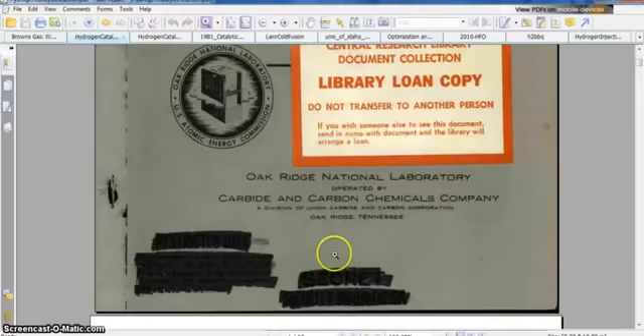One of them being the reactions between hydrogen and oxygen by catalysis and the thermal reaction. This was done by Oak Ridge National Laboratory. If you notice up here, this was once classified—it was declassified. This was put out as secret security information, put out in the 50s, January 15th, 1952. Subject category: reactors, research, and power.

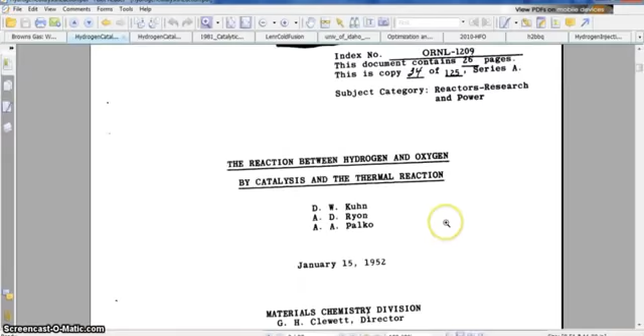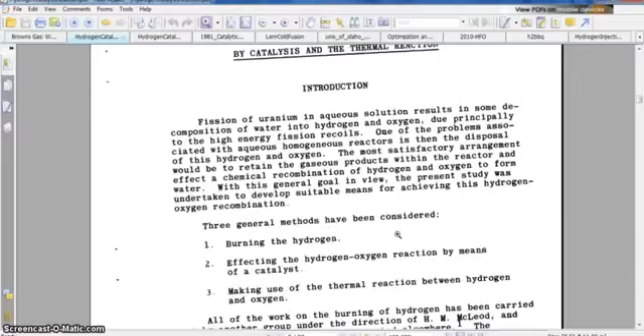This is a pretty interesting report as well, on just basically, it's not HHO, pure HHO is hydrogen. But he found this report that was done in the 50s on catalytic reactions.

And a chart here that was pretty interesting. Flow rate at 1 liter per minute. Temp of the gas is 144 Celsius, and then max temp in the catalytic converter is 242. They just go through these different ones. When you get up to these higher outputs, you get more. This is in Celsius, not Fahrenheit, and Fahrenheit would be a little bit more than that. But it just shows that you could get this thing pretty hot, these little reactors, or catalytic recombiners, so to speak. And again, this is just hydrogen.

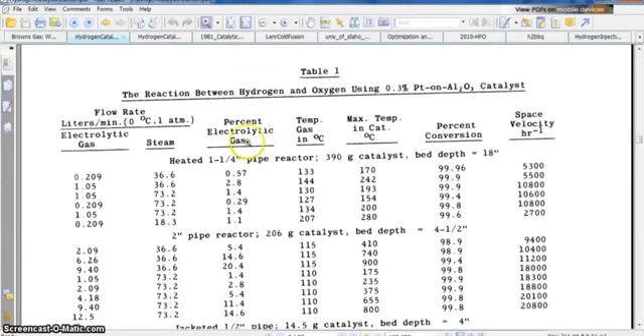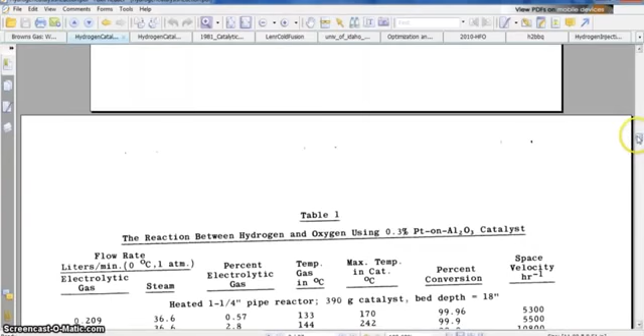Now, HHO is a special gas for me. Has some really unique and interesting properties. And I think these people, like this Oak Ridge National Laboratory, funded by the U.S. Department of Energy in a lot of ways, I think they know that. I think a lot of these reports put out by these big institutions that I have here were put out just based on H2 or hydrogen and nothing on HHO because of what it's capable of.

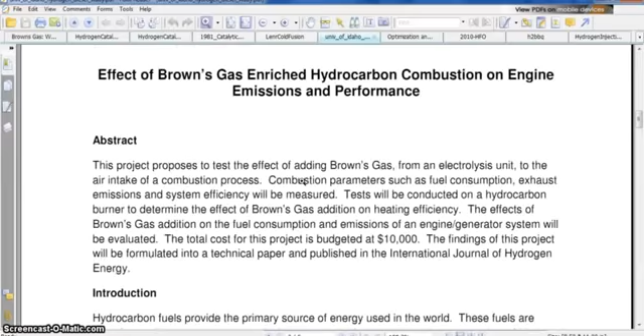But nonetheless, some of these companies have done things. This was by the University of Idaho, doing an effect of Brown's Gas enriched hydrocarbon combustion on engine emissions and performance. Basically HHO injection, submitted to the National Science Foundation. This basically proves that HHO injection does work with intelligent injection and monitoring.

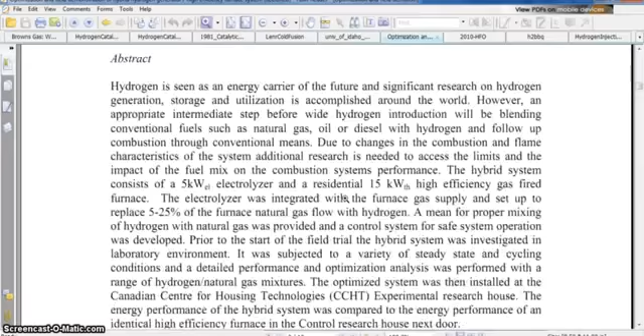Another one where they're actually injecting HHO or hydrogen into furnace systems, causing a more complete burn and more heat output. This was done out of a research institution in Canada, I assume, and all kinds of information in these, all kinds of where they're set up, and they give you the conclusions.

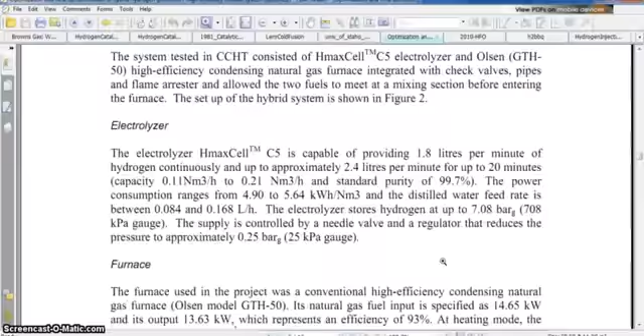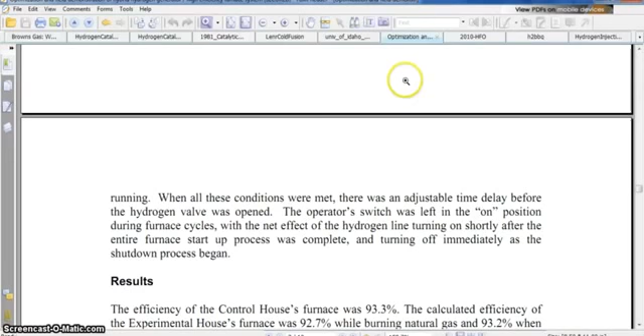Actually, HHO right now is being utilized on an industrial scale on coal-fired plants, things like that. They're injecting into the exhaust to sort of clean that before it reaches the exit of the building. But so much different stuff.

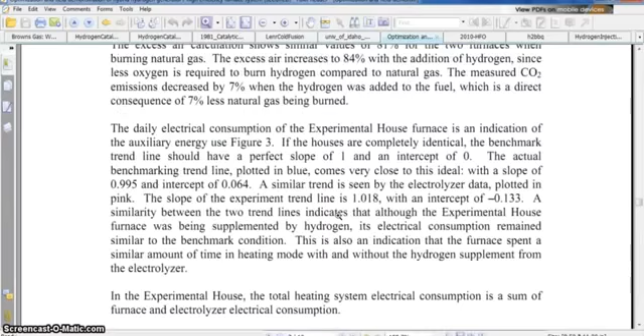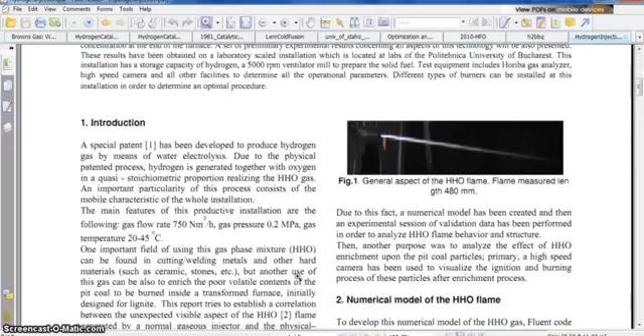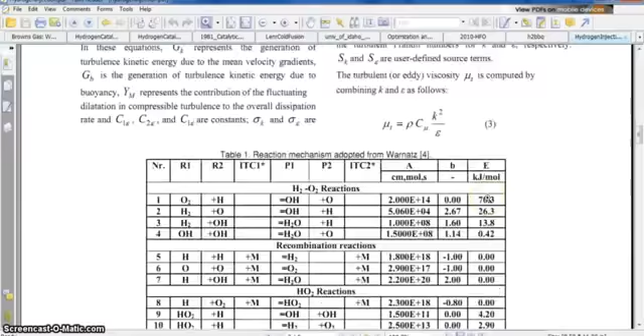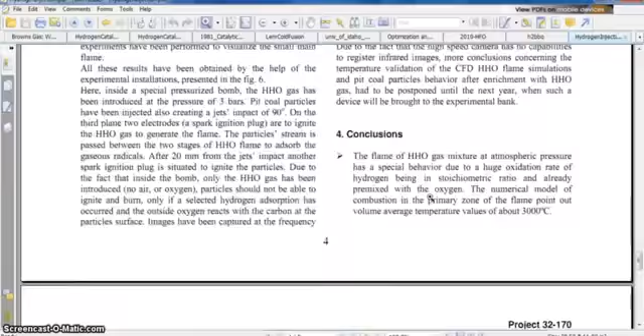Reports, this is just a few of them that were done. There's been reports by NASA. This is another one where they're reducing sulfur oxide emissions with this particular gas. All kinds of math, but it just, if you're really looking for it, there is proof out there. There is documentation, there is math, and there have been experiments and things done by big research institutions on HHO injection that proved that it does indeed work.

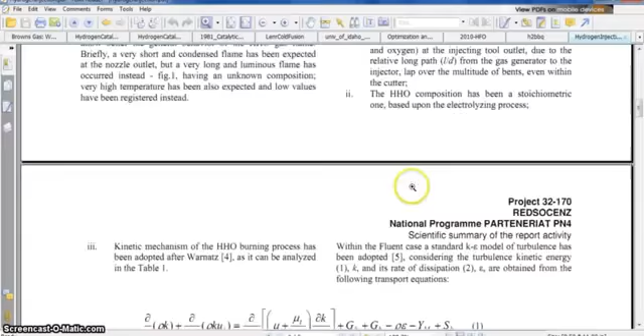But it seems to be, after reading all these reports, I haven't been totally in depth and gone through them with a fine-tooth comb. There's tons of them if you really look for it, well, not tons, but a few dozen of them if you're really aiming to look for it. But once you read them, you realize you have to have intelligent injection of it to really make a difference. But as I was saying, these are really neither here nor there.

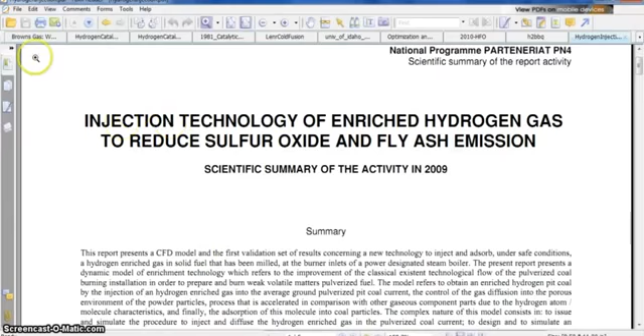These types of reports, you can go look for them if you want. My basic interest in this was, at the present moment, in these catalytic reactions. Again, this report was done, and they were using some of this information in the Manhattan Project. This was once classified information, and it's really based on just hydrogen and not HHO.

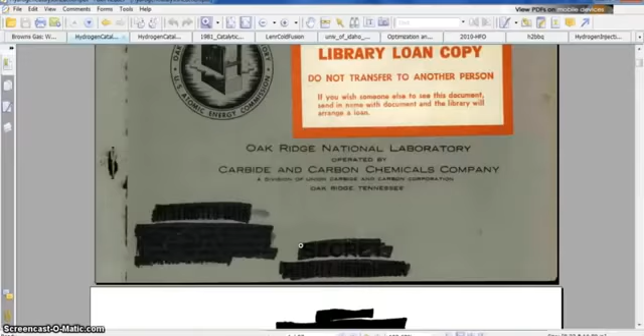I seem to have hit a brick wall everywhere, on YouTube as well, on some of this stuff as it pertains to HHO. You can't get BTU numbers. I don't really understand why it reacts to different materials the way it does, and it seems to be a bit of a mystery, which I've kind of figured out why over the years. I don't understand it all myself, but this Brown's gas, what exactly is it?

Put out May 1st, 2008 by Chris Ekman. This is a PDF file you can find on Google as well. It goes through and sort of touches on some of the tests they did, some of the interesting properties. It notes George Wiseman, another guy doing research into this years back. He still runs a website today that has some good information.

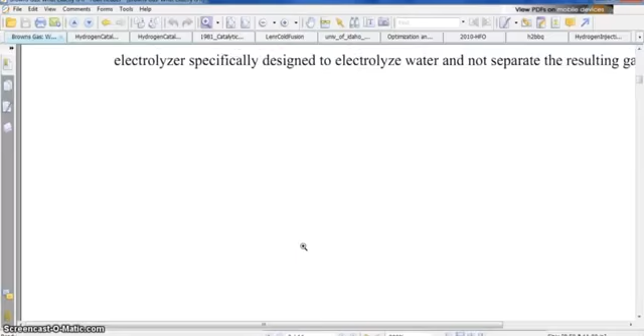We're actually going to show that in a few moments. But it goes through and does some experiments and tries to determine what Brown's gas is, and it's still kind of inconclusive as to what it actually is. Wiseman calls it electrically expanded water.

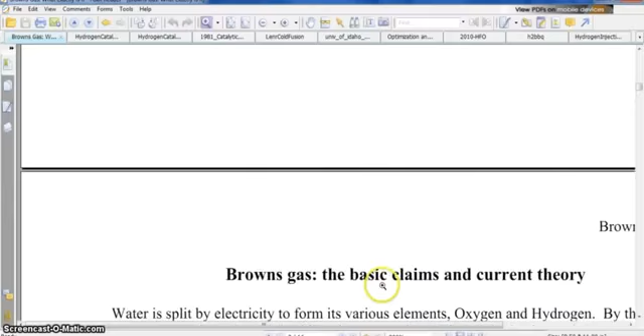When you get into this research, you see that HHO has an exotic side to it. They've actually measured heavy water inside of the reservoirs of these HHO systems after a certain period of running—deuterium and tritium.

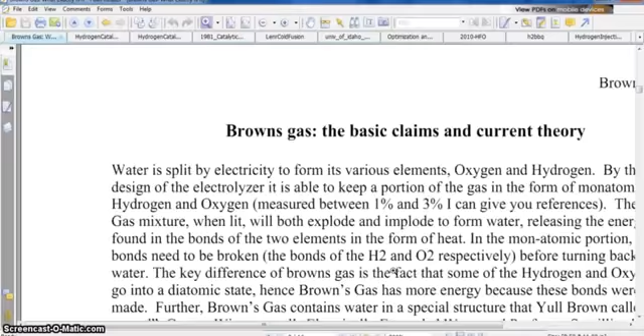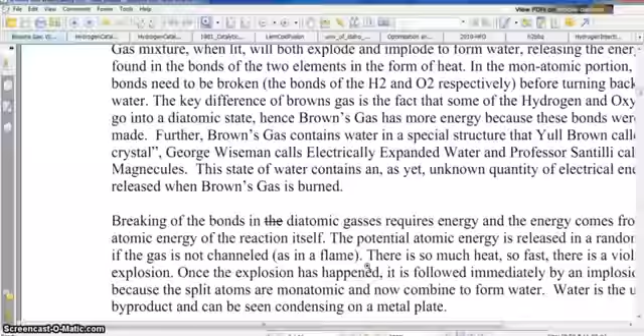It's really a complex idea, but HHO seems to be more energetic than hydrogen alone. And actually, in my own experiments, HHO seems to be more energetic than hydrogen and oxygen that's been split off and then tried to recombine it.

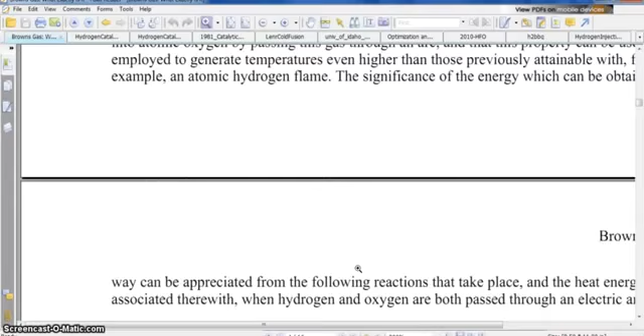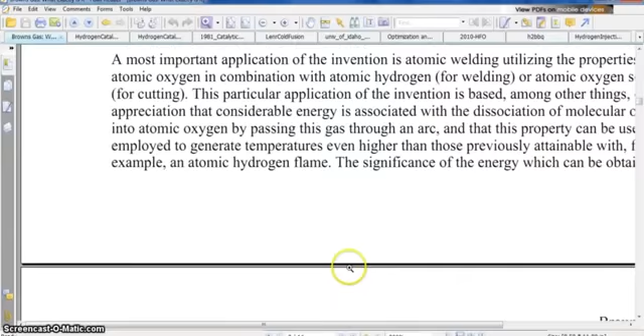I've tried to meter it back in off my split cell, and I can't get the same explosive power that I can get from just pure Brown's gas, HHO gas, hydroxy gas, oxyhydrogen gas, whatever, pure straight out of the cell. Seems to be more energetic than pure hydrogen mixed in with oxygen, tried to meter it back in.

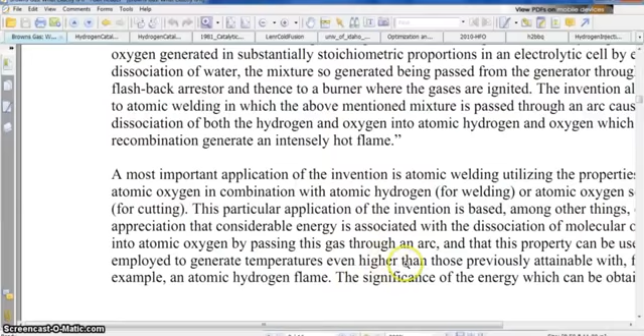Even if you try to do the 2-to-1 mixture, it still doesn't seem to be as energetic. Maybe I'm doing something wrong, but either way, HHO has a lot of unique uses and properties that's still yet to be determined and understood.

I'm still having a hard time finding any information as it pertains to HHO itself, because it really doesn't exist—even with all of these reports. There's no information when it comes to this coming from some of these big research institutions. I know they've done the research, but they haven't put the information out.

I think there's a reason for that, and I think I've stumbled across that. Can't say for sure, more testing has to be done, but I think I've stumbled across why there's not a lot of information as it pertains to HHO.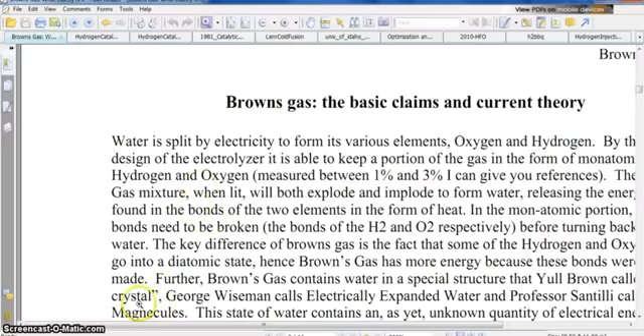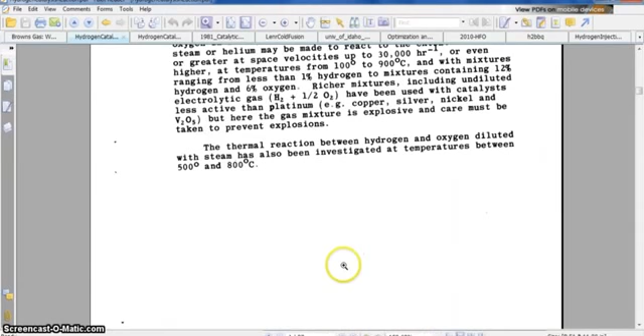Now, this particular report is very interesting, but it just proves to me that this stuff has been done a long time ago by all these companies, and they could have very well developed this for the average Joe to be in use. But again, my grandparents, my parents, and myself have never used any of this stuff at all, so obviously they were using it for their own benefit, their own personal agenda.

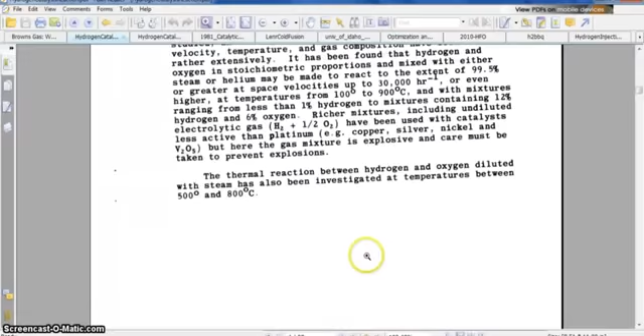I think a lot of this stuff was being studied for the development of the atomic bomb, and a lot for the space industry. A lot of this, they use hydrogen and oxygen in the space industry as well, and fuel cells.

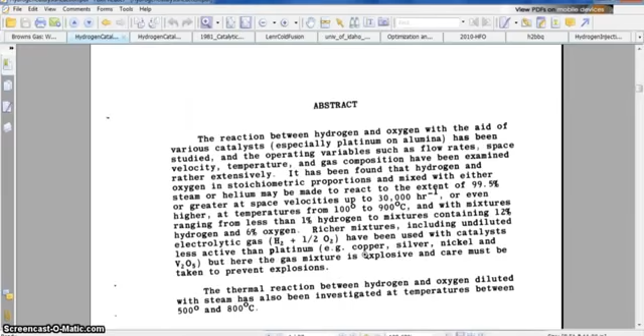But they were not researching this stuff for us. Obviously, they were not researching it to build us heaters. They were not researching it to build us solar hydrogen units where we can store the gas during the summer or when there's excess wind, and be able to use it again in the form of gas for heaters or for fuel cells. They were not doing these experiments and this work because of that.

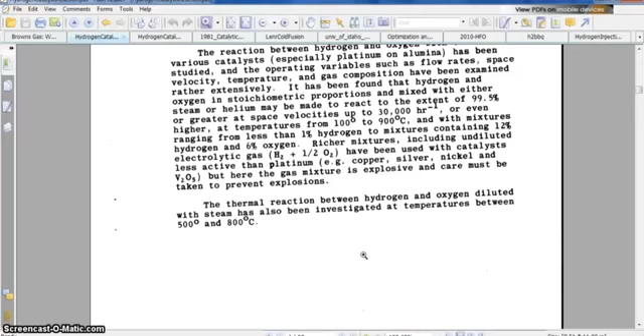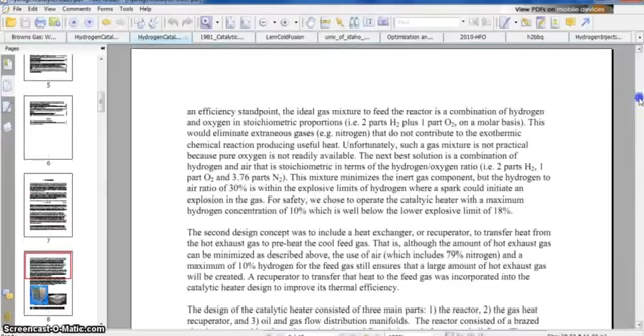Here's another one here. Oh man, these reports—this is a 30 kilowatt hydrogen catalytic heater that was developed. 30 kilowatt, and I'm just trying to freaking warm my toes.

But this is another one, and this was done by another research laboratory for the Department of Energy. You'll notice a lot of this stuff is funded by the Department of Energy. I wonder why that is, and yet they didn't fund it for us. They didn't use the information and products to develop stuff for us.

Nonetheless, there is a little bit of information on hydrogen catalytic heater technology. There's really not any commercial products available that utilize hydrogen as the fuel source for these types of heaters. There has been some simple conversions done, but again, it's only pure H2 that was bottled and compressed, coming out of a compressed bottle.

So I started doing a little bit of digging, a little bit more on Google—can't find it on YouTube, so you have to go to Google. And found a little bit of different information on this. Let's see where we're going with this right now.

We'll go here to George Wiseman's site at eagle-research.com. Mr. Wiseman was also once a very prevalent researcher of this stuff. He's got a wealth of information on his website, and one of them is labeled 'Politically Hot Brown Gas Uses,' where they go through some of the exotic uses of brown gas.

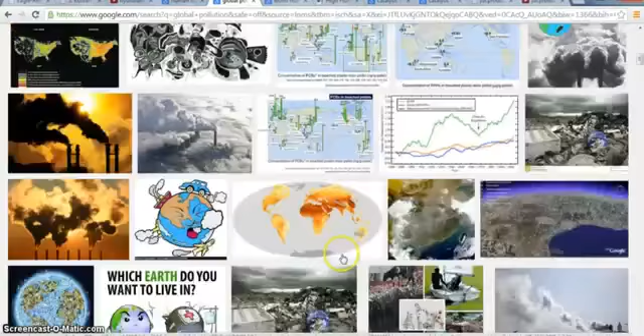And we also need to get this stuff developed for this problem, global pollution. You see these nuclear power plants and these coal-fired plants that are polluting the earth, the vehicles, the automobiles that are burning gasoline and diesel are polluting the earth, and we're like, what do you do? But we've got the technology, the tools, we have everything we need right now to make this happen, and we don't have to see stuff like this.

People, you can't pray to God that this will be solved. We have to solve it. Humans have to solve these problems. God is not going to solve these problems for us. Whatever your God may be, for me, God is everything, and we are gods.

We were supposedly made in God's image, and so we are the same gods that we are trying desperately to pray to for help and guidance. We are the ones that guide. We are God, and so we are the ones to fix these problems.

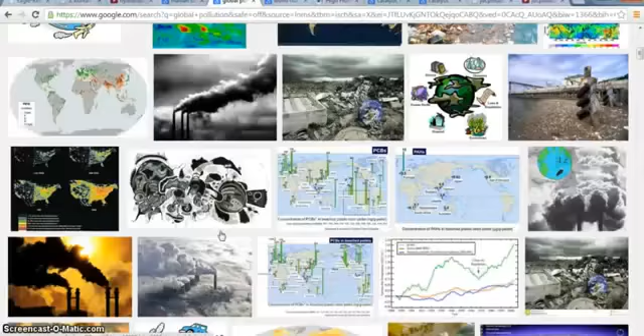Very simple problems we could all solve in a matter of, I would think, a decade. But you got to get off your ass, got to start sharing information, and you got to quit thinking about the dollar.

And when it comes to cold fusion and LENR research, it's a friggin' mystery to most of us, because these companies developing this stuff have investors tied up into it. They don't want them to talk about it. They're thinking they're going to become rich off of this stuff, so it's a mystery, and for the most part it seems to be very simple technology that we could all be playing with.

And in fact, with our electrolytic cells, we are playing with cold fusion. But to get some of the results these boys are playing with, I honestly think at this point in time, more testing needs to be done.

But we need to look at this. You need people to pull these catalytic converters off of vehicles, mine brand new, and start pumping HHO through it, and start figuring out ways to keep it from flashing back. Start documenting the temperatures of what you're getting out of this thing.

Because this could quite honestly become this exact same device, only we're doing it on a beer budget and with something that's already on the shelf.

So, in short, guys, I just want to say that I honestly think there's something to this. This could be made into really something great. I'd like to see an on-demand HHO catalytic heater developed that goes up against the on-demand resistive electrical space heater of the same wattage.